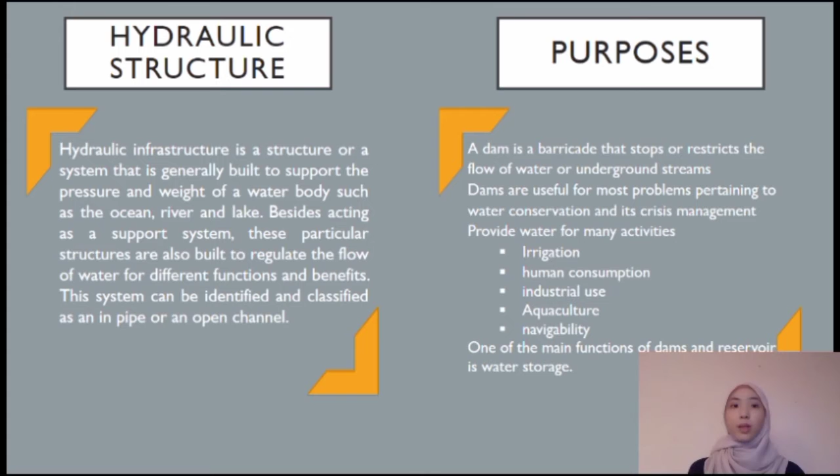The main function of dams is to provide adequate water storage to ensure regular water supply to activities such as irrigation and industrial activities. Other than that, dams can generate electricity by using hydropower, which is a clean source of energy that will not cause pollution.

However, despite having many advantages, there are also disadvantages of constructing dams. Environmentally, huge dams could disrupt local ecosystems and the groundwater table. They could also cause the extinction or overproduction of certain aquatic species.

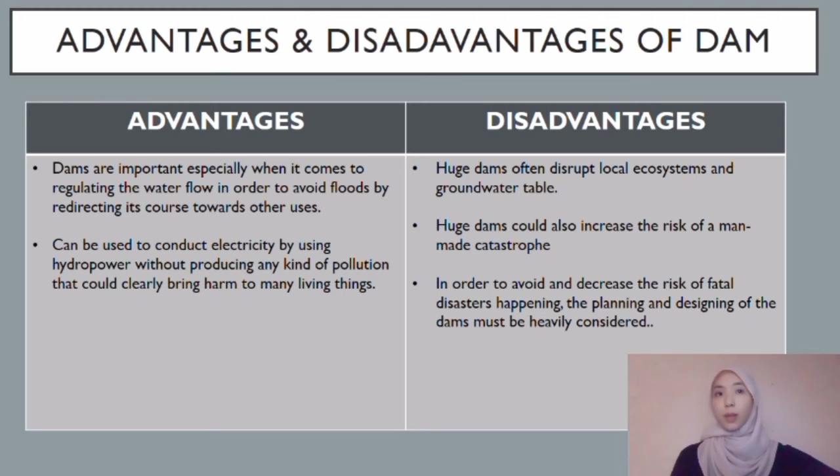On top of that, a huge dam increases the risk of a man-made catastrophe or disaster as a result of the destruction of the dam, and it could cause damage to properties, the economy, the environment, and worst of all, it could also be fatal. As a conclusion, the planning and designing process of the dam construction must be heavily considered.

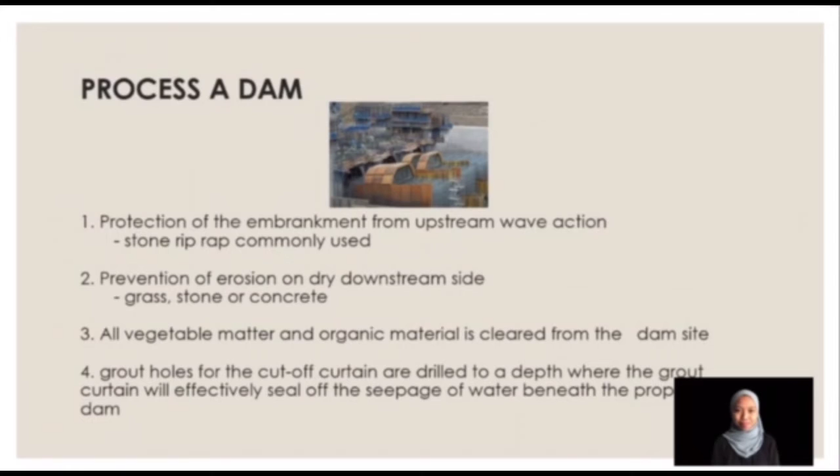Fourth, grout holes for the curtain are drilled where the grout curtain will effectively seal off the seepage of water beneath the proposed dam. Next, I will explain about how to build a dam. First, engineers must dewater the river. It is done by diverting the river through a tunnel. The tunnel may be lined with concrete and dug out using a combination of drilling and explosives.

Second, construction is started when the river level is low. Small dams are built upstream to keep the construction zone dry. Pumps may be used to remove water. Third, remove the loose rock and a plinth must be constructed. Plinths prevent water from leaking at the edge of the dam.

The last one is a concave curve downstream for a dam, which helps it absorb the constant pressure of water. Reinforced steel is used for the surface and the main enclosure is built. The enclosure is filled with concrete to make it extremely strong and resilient against water flow.

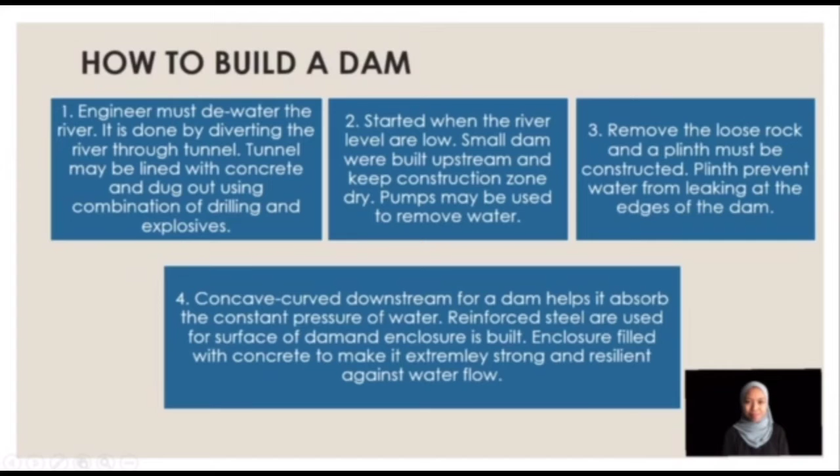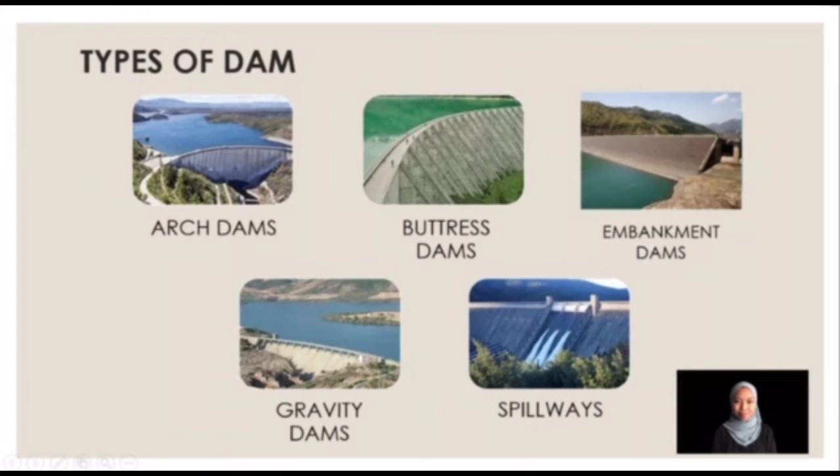Next is types of dam. We have 5 types of dam, which are arch dams, buttress dams, embankment dams, gravity dams, and spillways. The last one, I will explain about methods of dam construction. We have 2 methods to build a dam, which are the hydraulic fill method and the rolled fill method.

For the hydraulic fill method, the dam body is constructed by excavating and transporting soil by using water. Second, soil materials are mixed with water and pumped into the flumes. The last one, slush is discharged through the outlets in the flumes at suitable intervals along their length.

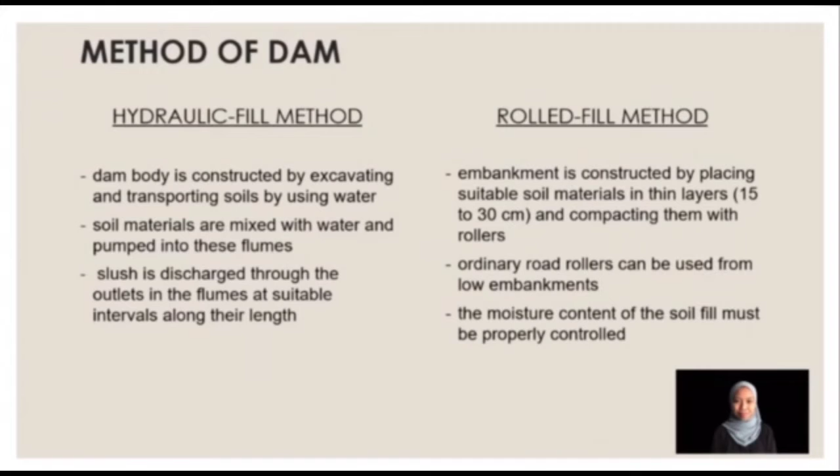For the rolled fill method, the embankment is constructed by placing suitable soil materials in thin layers, which is 15 to 30 centimeters, and compacting them with rollers. Second, ordinary road rollers can be used for low embankments. The moisture content of the soil fill must be properly controlled.

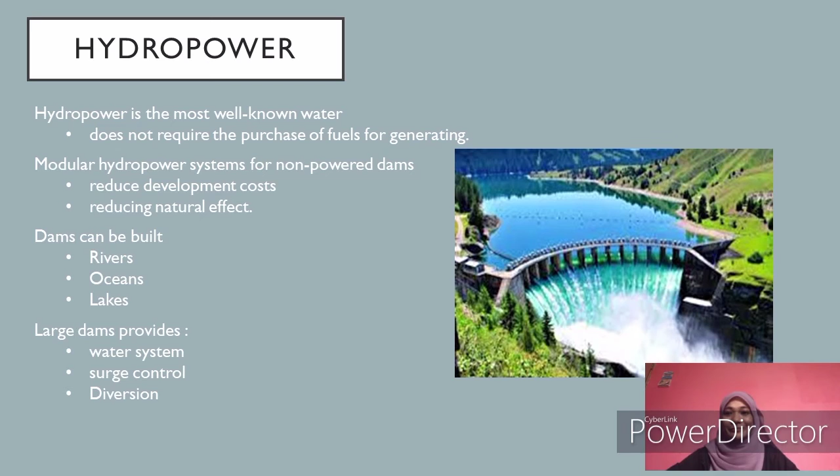The second is powerhouse. The powerhouse and spillway are major elements of the concrete part that is often included in composite dams. This type of dam combines the advantages of both soil and concrete dams. The potential energy of water is converted to a motor that drives the turbine using a simple principle.

In the case of run-of-the-river dams, the potential energy contained within the flowing water is changed over through a simple concept to a drive that turns the turbine. The turning of the turbine gives the desired mechanical energy to control a generator for electricity generation.

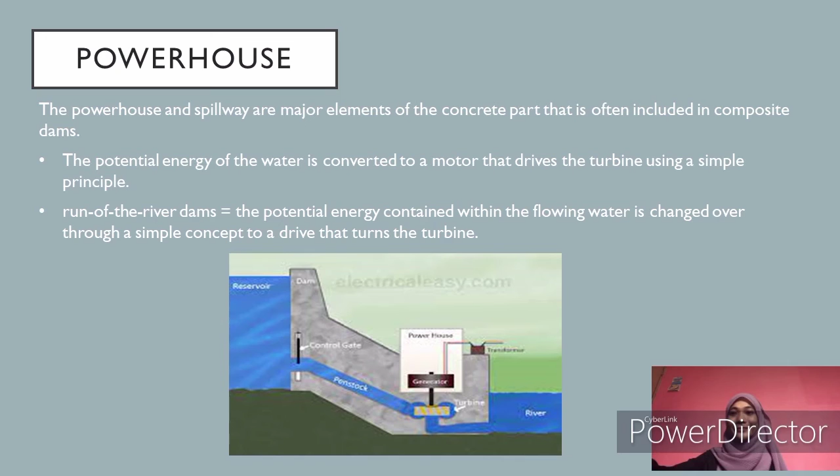The third is the turbines. The most common types of turbines used in dams are impulse turbines and reaction turbines. Impulse turbines is where the water can enter the casing with a large weight and flow through, where high-speed jets of water from a nozzle impact the symmetrically formed edges settled on the rotor.

These turbines are constructed within the dams and have entirely varied bearings based on the site topography, head of water, and discharge. This type of turbines are classified as Kaplan or Francis turbines.

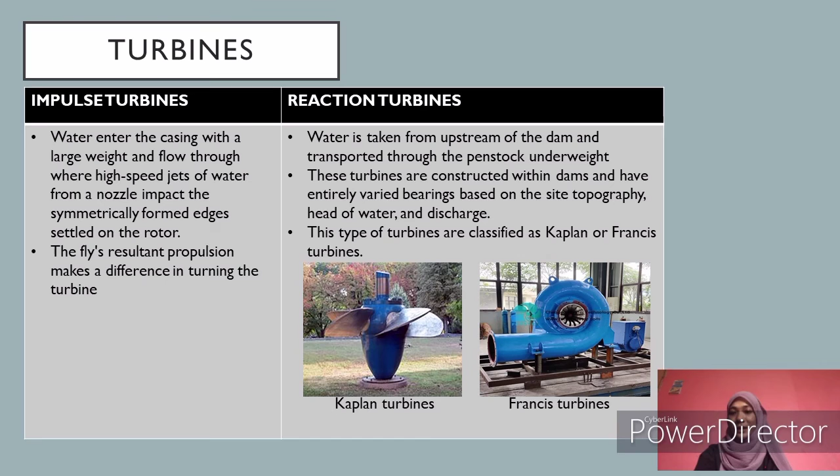There are different types of dam all around the world, such as gravity dam and embankment dam. 93% of dam types is by far composed of earth and rock fill dam. Different types of dams have different consistency of materials. For example, a rock fill dam is an embankment dam, with more than 50% of the volume consisting of compacted or dumped pervious natural or crushed rock. Thus, foundation requirements are less stringent than for other types of dams.

51% of dam failures are caused by foundation failures, including uneven settlement and earthquakes. Next is inadequate spillways, with a percentage of 23. 7% of dam failures are caused by piping and seepage, including embankment slips and high pore pressure. Meanwhile, 19% of dam failures are caused by other issues, such as defective materials and improper construction.

Besides that, dam failures can also result from overtopping. These failures could cause the dam to breach or destruct. It is clear that the most frequent issues related to dam construction are foundation failures, inadequate spillways, piping and seepage, overtopping and other issues as mentioned earlier. The planning, designing and execution of the dams must be done properly in order to avoid overall dam failures.

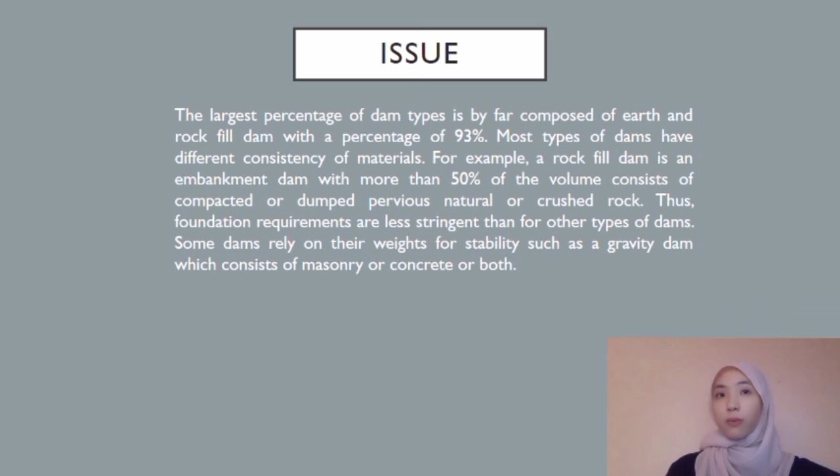I will present the recommendation and conclusion. For the recommendation, the engineer might utilize slope stability computer algorithms to search for the crucial failure surface within a field embankment. Other than that, there is one technology that can be used, which is unmanned aerial vehicles. It is one technology that can be employed during the construction period.

It is also used to create a 3D model to track the development of the dam project using BIM and provide real-life data of fracture and dam movement. So, incidents can be avoided and cause less harm because engineers are aware of what is going on with the structure.

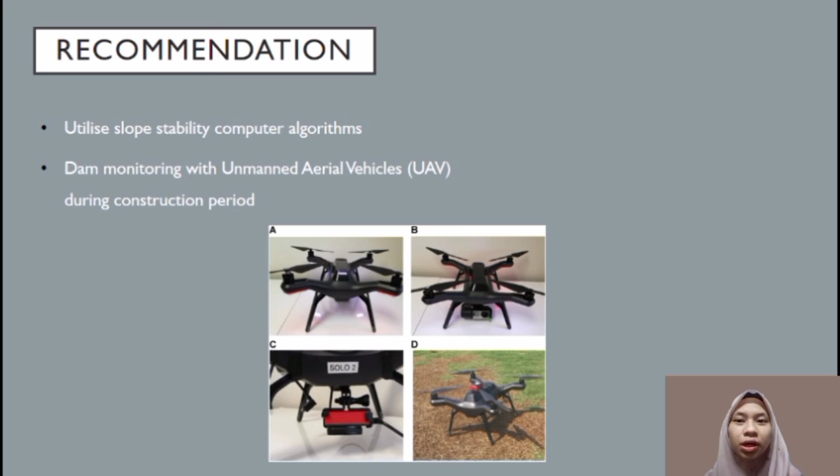So, the conclusion is dams are known for their good consequences such as flood control, irrigation and hydropower, while the implications are displacing people, disrupting environmental services and livelihoods. It also assists people in many ways, such as flood risk mitigation, electricity generation and agriculture. There are many elements to consider to build a dam, such as existing facilities, including the age, condition, and adequacy of existing structures.